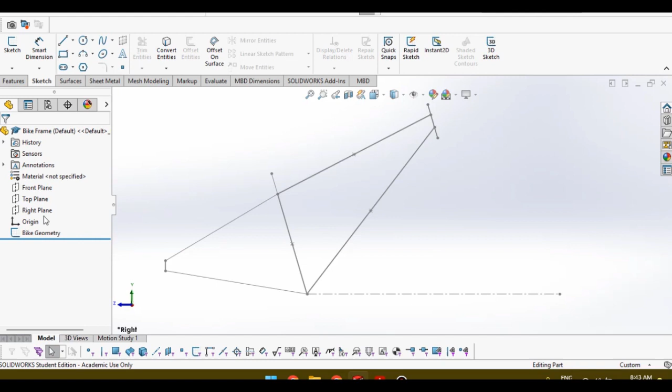Right, so the next step, once you've done your bike geometry sketch, we'll now have to make the bottom bracket, the seat tube, and then the head tube. So for the bottom bracket, we'll just simply make a cylinder, 40 millimeter, and then we extrude it at 68 millimeter. Right, so to do this, it's better to create exactly a new sketch.

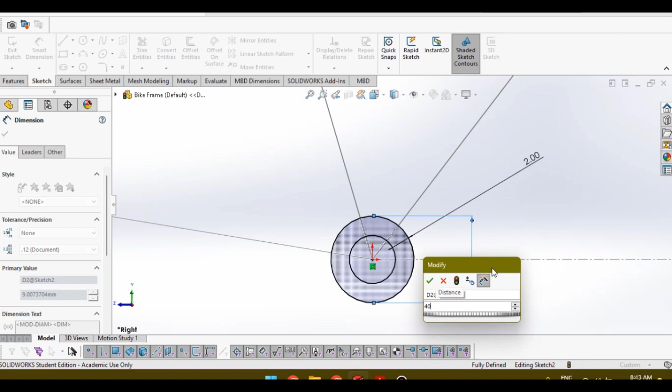So this is just a sketch on the right plane. So I'll make two circles here, right? Their thickness would be 2 mm, while the outermost diameter would be 40 mm, just like that. Then from there, we simply extrude that by 68 millimeter.

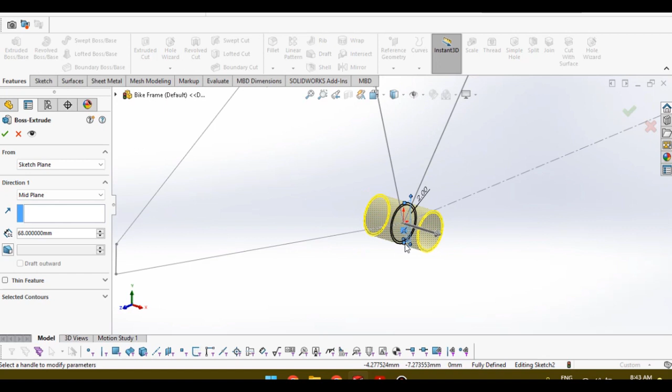So 68 millimeter. Now if you notice, it will be extruded blindly like that. We don't want that. What we do is we set it to mid plane so that it will be extruded right smack at the middle, and that's what we want. Then you just simply accept that, and now you have your bottom bracket.

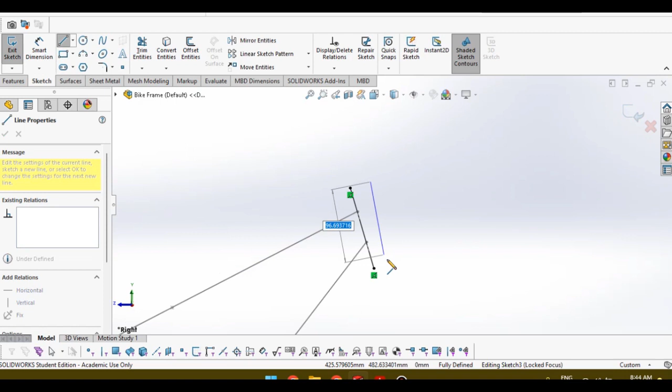Now the next thing that we'd want to make is probably the head tube. So again, I'll make a new sketch. So here we have to create first our axis of revolution. So the technique we're gonna do for the head tube is called the revolve technique. So we simply need to sketch one side of our cylinder.

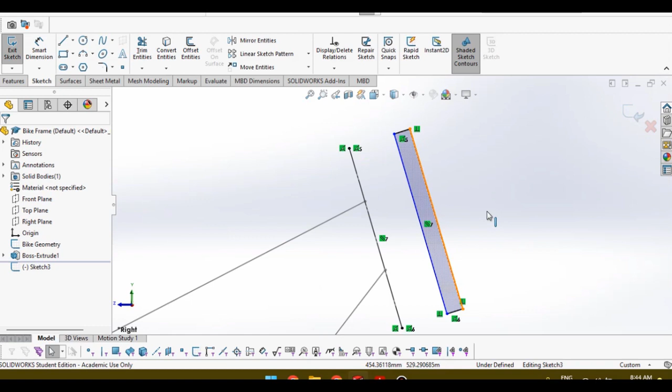So in this case, it is just a simple rectangle, and we just have to make sure that our rectangle is parallel to this center line there. Let's look at the dimensions of that. That's 38, and I'm assuming the inside diameter or the thickness is also 2 mm. So this needs to be 38, and the thickness will be

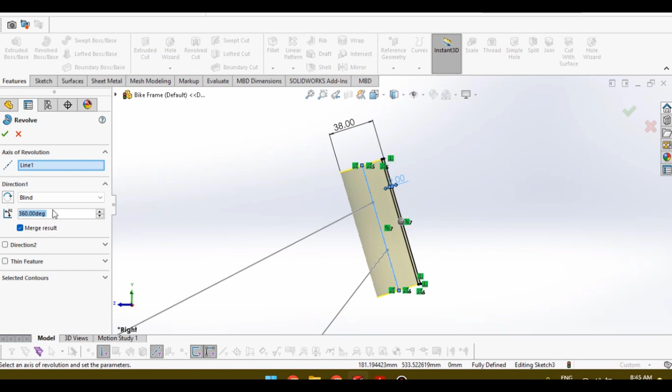2 mm. And then we simply revolve that, and since the center axis is a construction line, the software will automatically set it as the axis of revolution, and it will do a 360 revolution, making a cylinder, and we simply just uncheck the merge result, and we accept that.

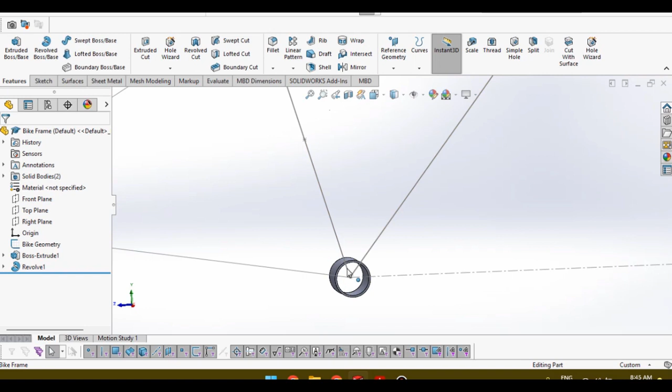Right. And then from here, we can now make the seat tube. So to be able to do that, there's two ways. You could use the same technique as the head tube, but then you have to cut it so that it will not go through the bottom bracket. But what I will do is I will make a plane here, a reference plane using the point line method, and I will make two circles, and then I will simply extrude it up to the surface of the bottom bracket.

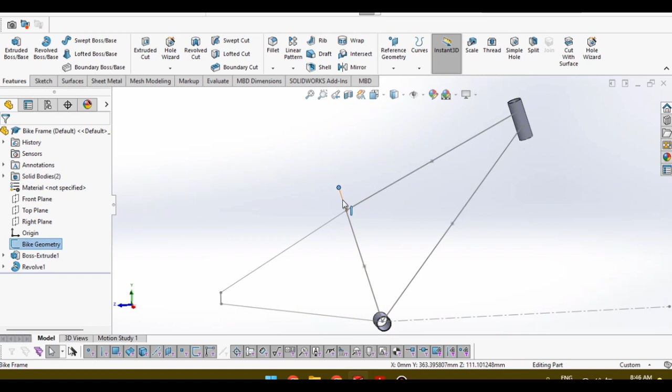So the first thing I do is I select the point, and I press Ctrl on my keyboard, and I select this line, and I'll choose the plane. And what it does, it makes a plane perpendicular to the line and right smack at the point that I've selected. So you just simply accept that, and then from there we make a sketch on that plane.

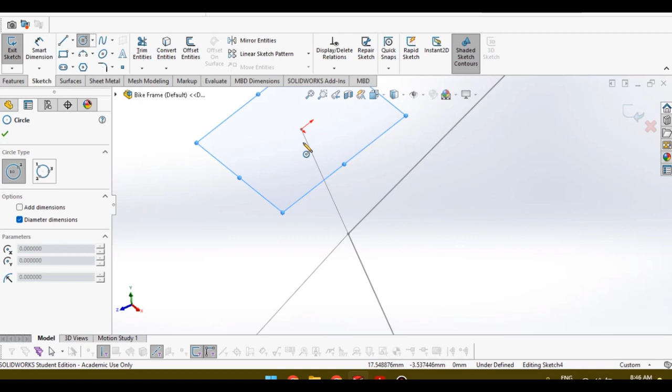It's gonna be two circles, one and then two. Then let's check the dimensions. So this is supposed to be 34 mm. Let's just make the thickness maybe 2 mm as well. So the outside diameter is 34, while the thickness would be again 2 mm.

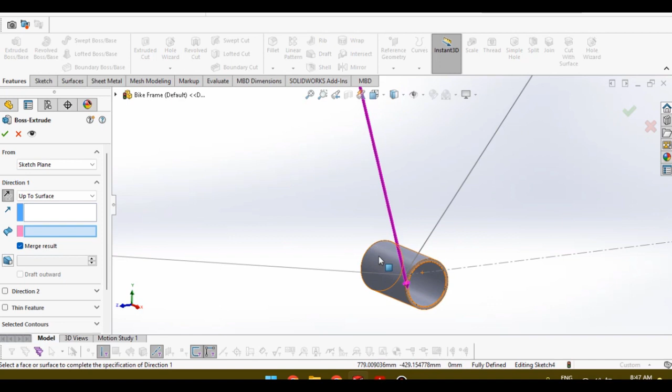There. Then we simply extrude that, but instead of extruding it mid-plane or blind, because if you're gonna do this, you're just gonna extrude it like that, you're gonna pass through the bottom bracket, which is wrong. We don't want that. So what we do is we set it to up to surface, and we simply select the outer surface of this bottom bracket, and there it will extrude it up to that surface only.

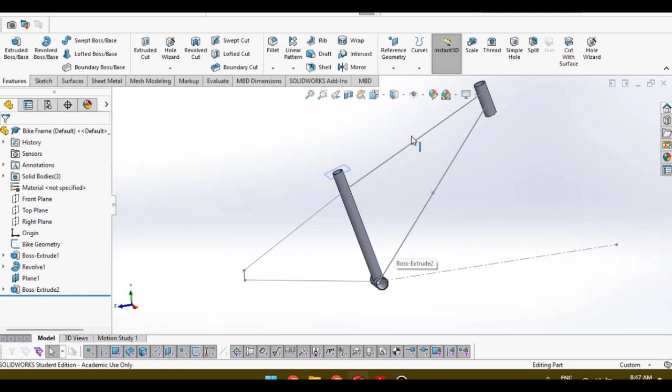So right now you could merge the result if you want, but in my case I will unmerge it, because later on when you want to prepare technical drawings and you want to get the notching profile of this, it's better to not merge our tubes for our bicycle frame.

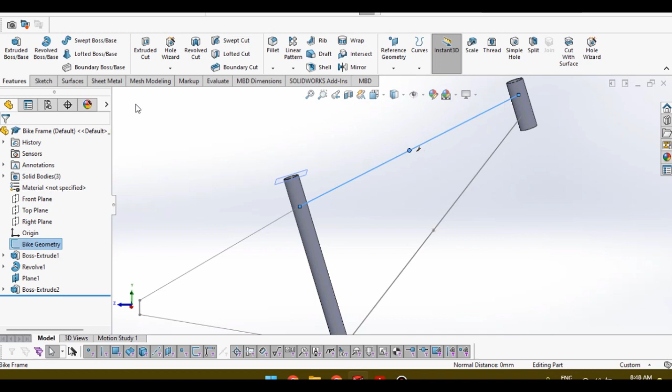So there. Now, for the top tube and bottom tube, we do the same technique as the seat tube. But the difference is we have to make a plane right smack at the middle. So that's the reason why we created this point when we created the bike geometry sketch, because we will use this point and press control and this line to make our reference plane, just like that. So you could make it smaller just to make our workspace manageable.

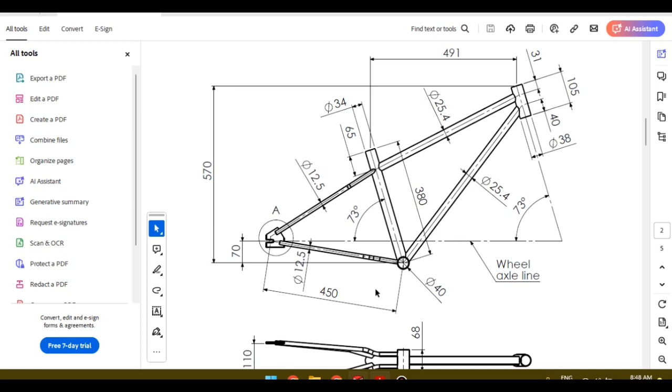And from that plane, you create your sketch. Again, this will be two circles, 1 and 2. And the dimensions of that would be 25.4. We're just gonna assume that the thickness is again 2 millimeter. So this will be 25.4. Alright, so it's small, and then this one would be again 2 millimeter.

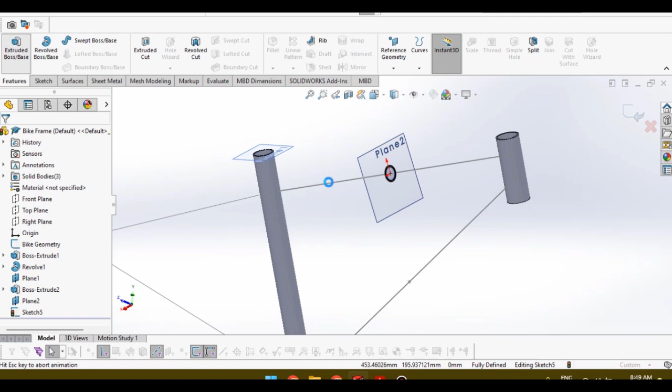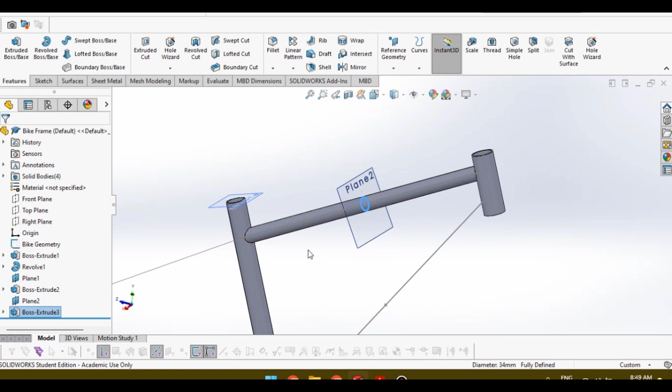Now, what we do now is we extrude that up to the surface. See, up to the surface of this. So one there, and then we will have to do another direction, but in this case up to the surface of the head tube here, just like that. We will unmerge it, and then you accept that, and you have your head tube.

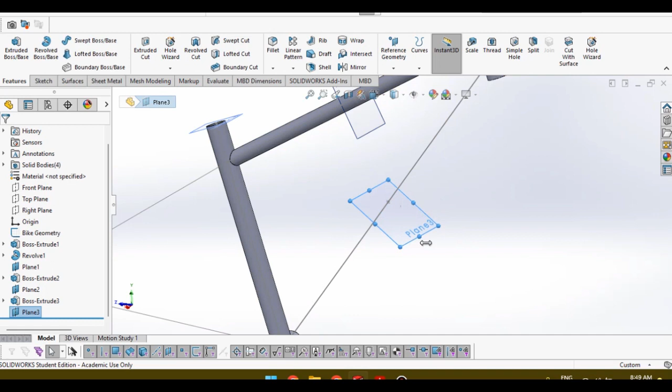Okay, so I'll just do the bottom tube very fast. So again, select the point, select the line, make a reference geometry there. In this case, a simple plane. I always manage my plane like this. It doesn't matter if your plane display is small, it is still big. This just makes my work area more manageable. I tend to, you know, organize it better in this way.

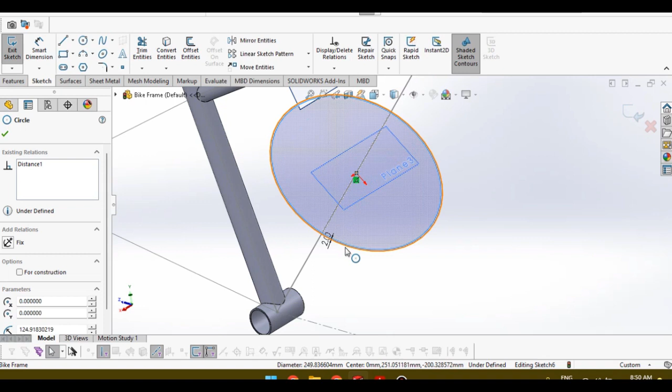So this is 2 mm thickness. So if you notice, even if I make a large sketch like that, that's still possible even if my plane is small. So the plane is actually unlimited. It's just how it is being displayed. So this one, instead of 25.4, I'm gonna make it a little bigger. I'm gonna choose 31 mm because I think the bottom tube should be thicker or heavier.

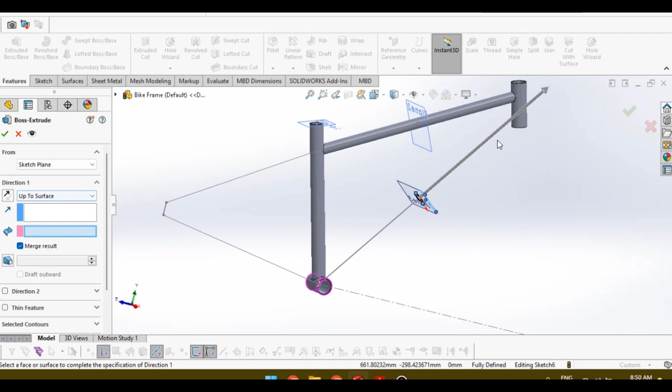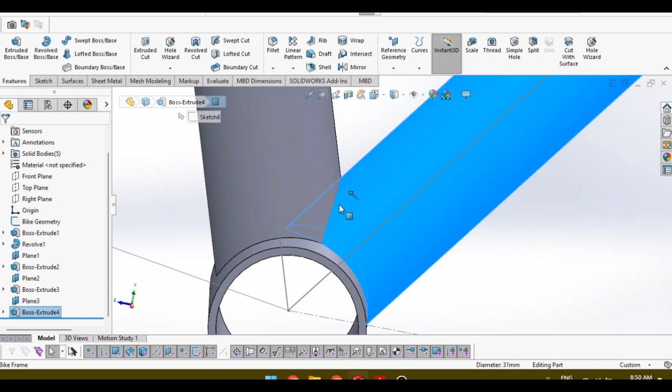Again, up to the surface of this, and then on direction 2, up to the surface of the bottom bracket. There. Okay, unmerge that and accept. Now, the only thing that will happen here is that this seat tube and the bottom tube actually intersect each other, and we don't want that. So you have to decide which one to cut. Either cut the seat tube or cut the bottom tube. In my case, I'm gonna cut the bottom tube.

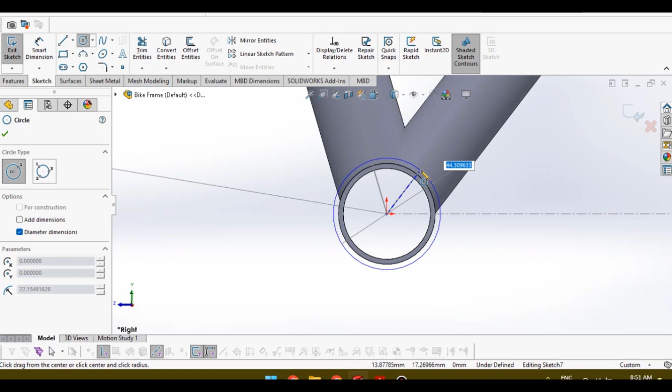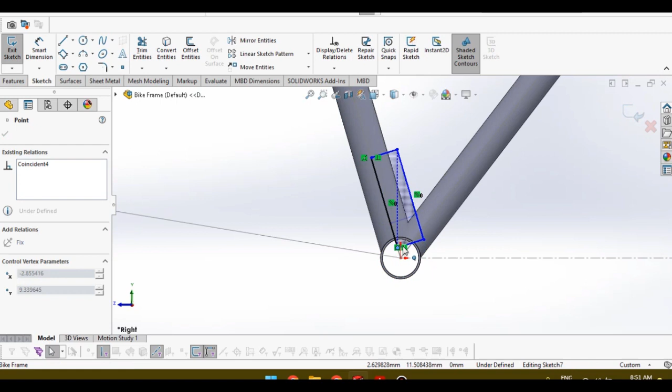So I'm just gonna make a plane. I'm gonna make a sketch on the right plane, and I'm just gonna create a circle as big as, no, this is wrong. I'm gonna make a rectangle similar to half of the bottom tube. Yeah, I'm gonna make it a 3-point rectangle just like this. Gonna extend it all the way, probably somewhere here, and I'll just make this line and that line coincident like this,

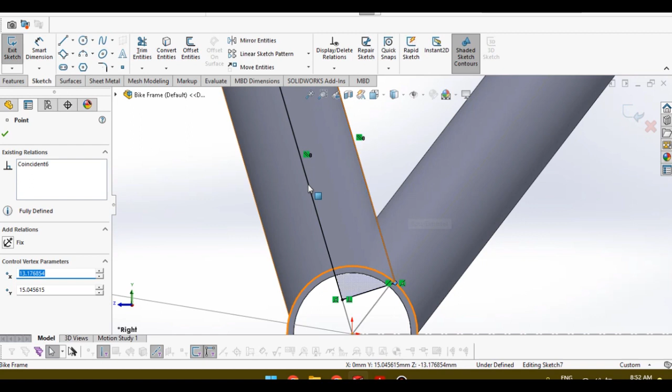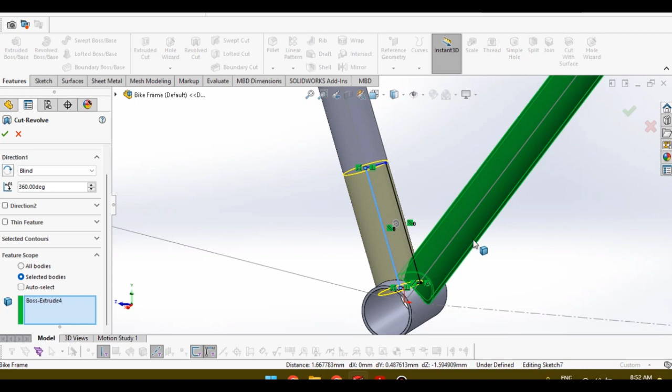collinear, I guess. So what will happen is that it will try to cut this tube when we revolve this. Okay, so let's try to do that. This is going to be called cut revolve, and we select the axis of revolution there. So that will cut this, but instead of just accepting it, we have to select the body that it needs to cut. In this case, only this one, because if you also select this, it will also cut that body. So only select this so that it will only cut that particular body.

And there, now it is correct, just like that. Okay, so our next steps would be making the seat stay and the chain stay, and finally the dropout when we come back.